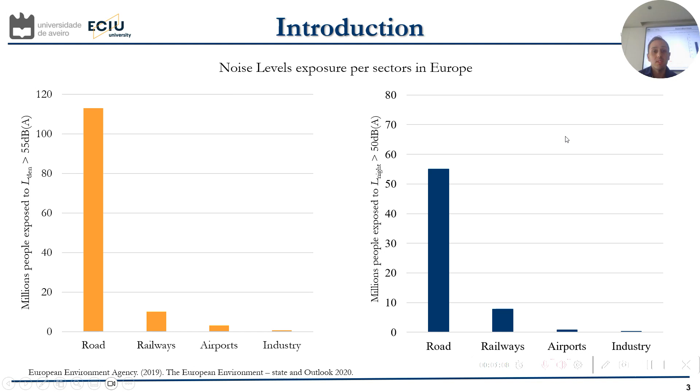Noise pollution causes several problems, in particular several health problems such as annoyance, sleep disorders, hearing problems, heart complications, and recently it was assessed that more than 1.6 million disability adjusted life years were lost in Europe because of problems caused by noise exposure. Therefore, trying to assess and to forecast noise levels, and in our case, road traffic noise levels, is very important.

And in the last decades, research focused on road traffic noise models that can be divided into two main categories. On the one hand, we have statistical models that are based on regression. Basically, they take as inputs the traffic volumes of light duty vehicles together with the percentage of heavy duty vehicles in the traffic flow, and they give us as output the equivalent noise levels.

On the other hand, we have more advanced models called dynamic models that can be seen as a union between the noise emission models and the sound propagation models. A noise emission model gives us information on the sound power level of the source, in this case of vehicles. Basically, they take as input information regarding the category and the speed, and give us the information in terms of sound power level of a vehicle.

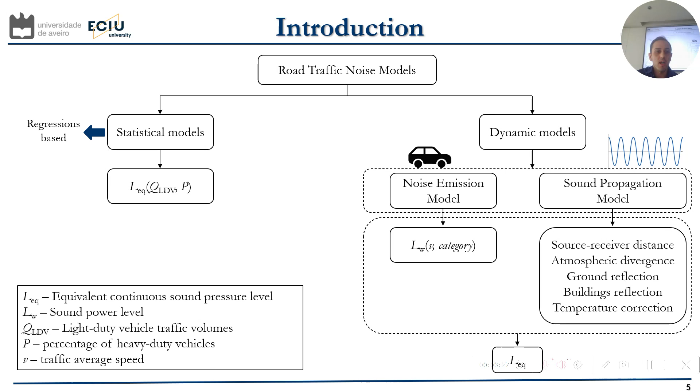Particularly, no noise emission model provides a deep characterization of vehicle emissions based on motorization. And with motorization, I mean diesel, gasoline, hybrid, electric, LPG vehicles. No extensive studies on vehicle noise emission based on the engaged gear were presented in the literature, and scarce attention was reserved for vehicle noise emission at the exhaust, basically in idling condition when the vehicle is stopped in neutral gear but the engine is on.

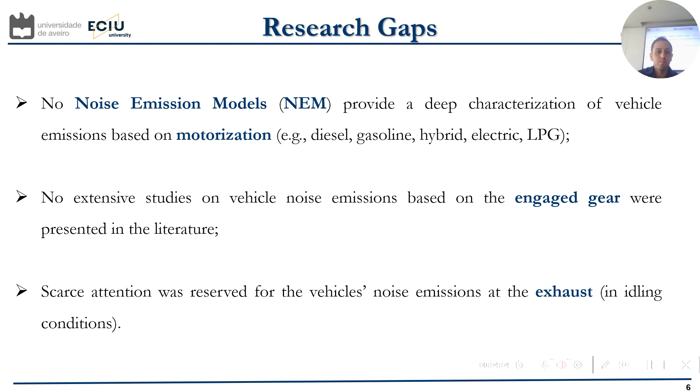Therefore, we would like to fill these gaps by developing noise emission curves. A noise emission curve is the relationship between the sound power level and the speed based on motorization. To provide the noise emission curves based on the engaged gear, just for manual transmission vehicles, and to provide a mathematical relationship between the sound pressure level and the engine revolutions per minute for the characterization of the vehicle noise emission at the exhaust.

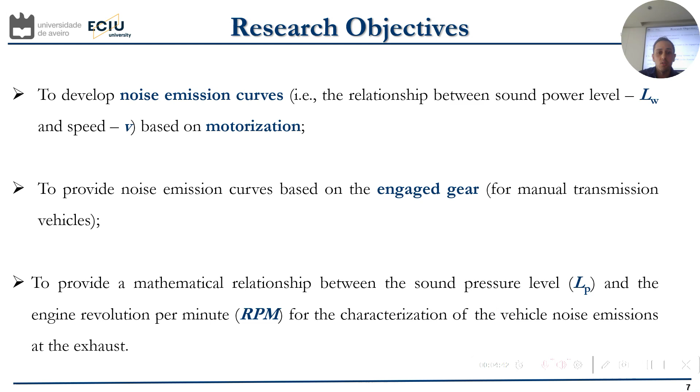So we used two probe vehicles, one diesel powered and another bi-fuel, gasoline and LPG powered, with different weights and engine sizes, and we equipped them with an onboard diagnostic system in order to extract data in terms of speed, position, and engine revolutions per minute. And we conducted several single pass-by tests on a track located in Battipaglia in the south of Italy.

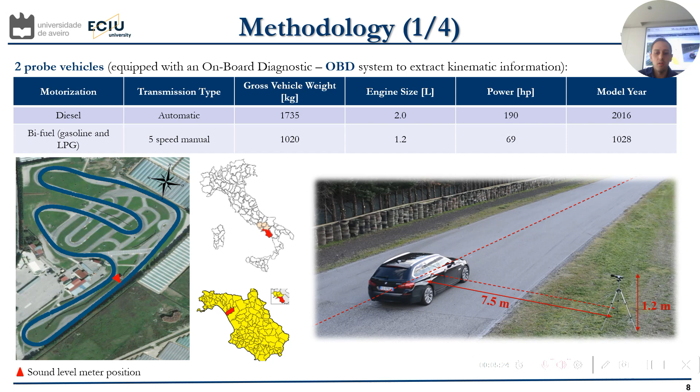And now I would like to speak a little bit deeper about the statistical pass-by test. The statistical pass-by tests were conducted to obtain the noise emission curves. They are based on the standard 11819 and basically a probe vehicle is driven on a track in absence of other noise sources, and at the same time a sound level meter is placed at 7.5 meters from the central axis of the track at a height of 1.2 meters.

The driver needs to maintain a constant speed at least 10 meters before and after the sound level meter. And if during the test the peak in terms of maximum sound pressure level is at least 10 decibel higher than the background noise, then the test is valid and we can estimate the sound power level through the sound propagation formula.

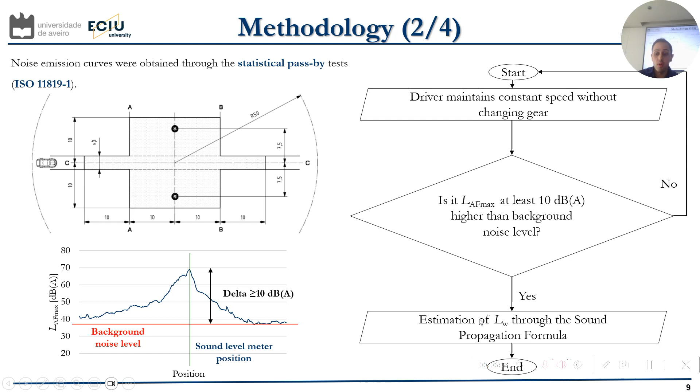Here in the first equation, I reported the sound propagation formula. So basically, by knowing the distance between the receiver and the source, in our case 7.5 meters, and by knowing the LAF max recorded during the test, we are able to estimate the sound power level.

At the end of the data collection, we have a data set composed of speed values and sound power level values that we can fit through a nonlinear regression. We need to find the coefficients A, B, C, and D by minimizing the sum of the square errors.

In this case, the coefficients A and B are related to the engine noise contribution that linearly depends on the vehicle speed, while C and D are related to the rolling noise contribution. With the rolling noise contribution, I mean the interaction between tires and road surface, and this part depends logarithmically on the vehicle speed.

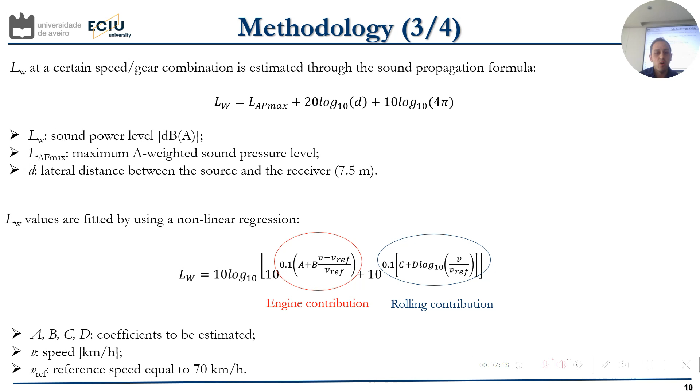Then, in order to characterize the noise emission in idling conditions, we performed an ad hoc data collection by placing a sound level meter at 0.5 meters from the exhaust tailpipe of the car, forming an angle of 45 degrees from the longitudinal axis of the vehicle.

Basically, we equipped the vehicle with an onboard diagnostic system, and the driver inserted the neutral gear and started increasing the revolutions per minute by acting on the throttle pedal. And we recorded the sound pressure level with the sound level meter.

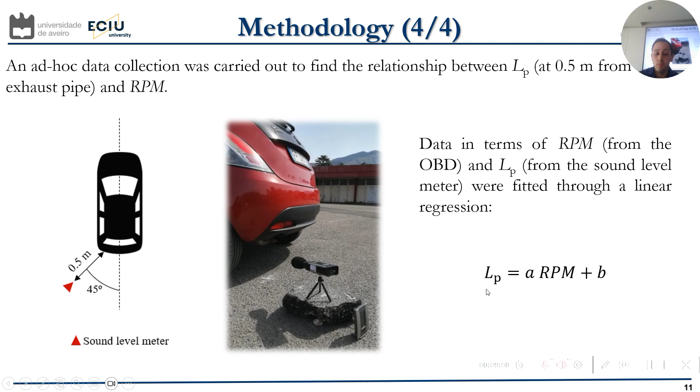Of course, the clock of the smartphone that was connected with the OBD and the clock of the sound level meter were synchronized. In the end, we have a data set in terms of RPM and sound pressure level that we can analyze, and we can fit the data using this linear regression. We need to find the coefficients A and B.

As for the results, here I reported the noise emission curves coming from the statistical pass-by test, both for the diesel vehicle and the bifuel vehicle. We obtained good regressions, as we can see from the determination coefficients that are above 0.95.

For the bifuel vehicles, we can notice that there is a certain dispersion of the measured values, mostly at low speed. And this can be basically due to two things that happened during the data collection: either there was an incorrect lateral distance maintained during the data collection by the drivers, or this is due to the effects of the engaged gear that can strongly influence the measured data in this speed range.

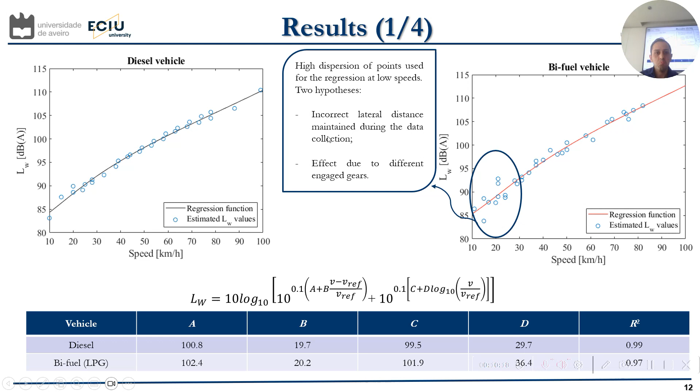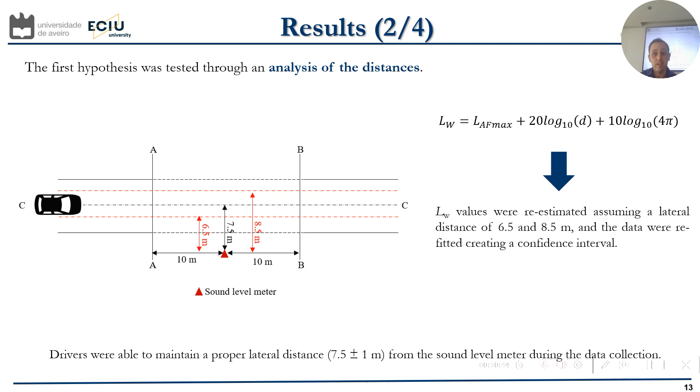In order to verify the two hypotheses, we first conducted an analysis of distances. Basically, we re-estimated the sound power level by assuming a source-receiver distance of 6.5 and 8.5 meters in order to create a confidence interval. We fitted the data again, and we can see that for the diesel vehicle, almost all the points are in this region, while for the bifuel vehicles, we have quite the same, but the points mostly at low speed are out of this confidence region.

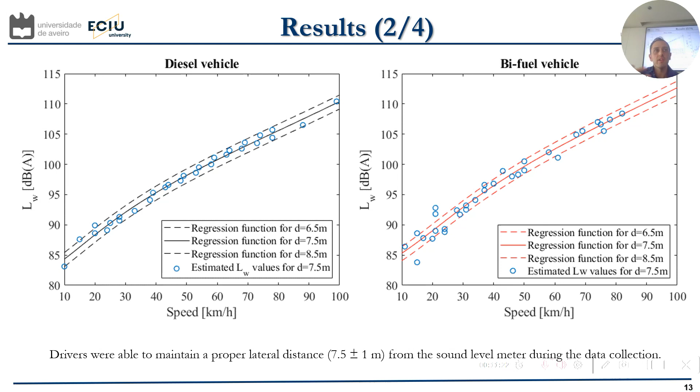But we can say that the tests were conducted properly by the drivers, and indeed by conducting a further analysis we noticed that if we fit the data at low speed by using a linear regression and dividing the data set between the runs performed in first gear and the runs performed in second gear, we obtain a very good regression, and we can explain this dispersion of measured points at low speed by assuming that there was an influence of the engaged gear.

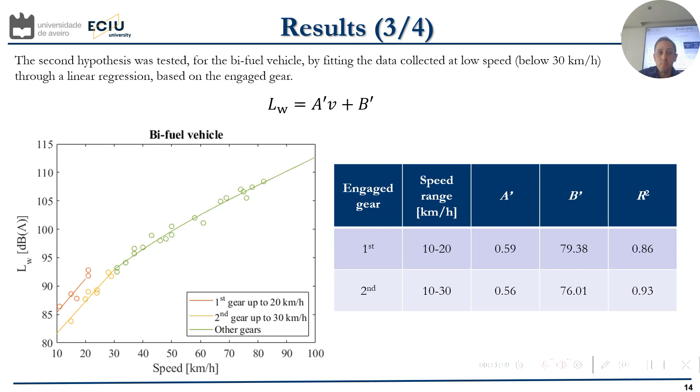Finally, here I'm presenting the results related to the exhaust noise emissions. As you can see, the sound pressure level at 0.5 meters from the exhaust system linearly depends on the revolutions per minute. This is basically due to the fact that this type of emission depends on the engine operation, and usually there is a linear relationship between the noise and internal engine variables. We obtained a regression with a high determination coefficient.

Please note that in the case of the bifuel vehicles, we repeated the data collection by powering the vehicles with gasoline and with LPG. And in this case, we can note in this graph a certain variability in terms of noise emission when the vehicle is powered with one type of fuel and with another one.

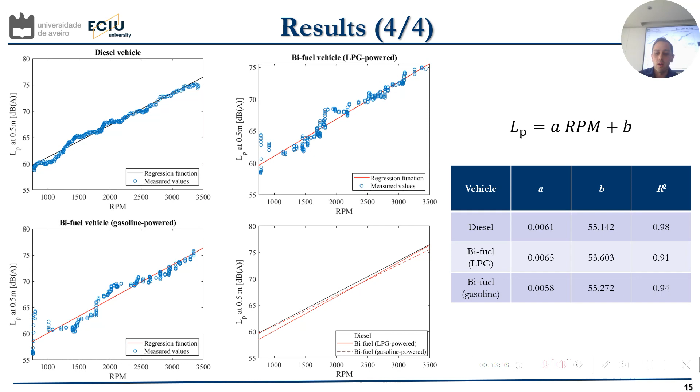So, to conclude, noise emission curves based on vehicle motorization were provided, and they can be incorporated in the framework of a noise emission model. Noise emission at low speed, below 30 kilometers per hour, depends on the engaged gear for vehicles equipped with a manual transmission, and the vehicle noise emission at the exhaust pipe was obtained through a relationship that binds the sound pressure level at 0.5 meters with the engine revolutions per minute.